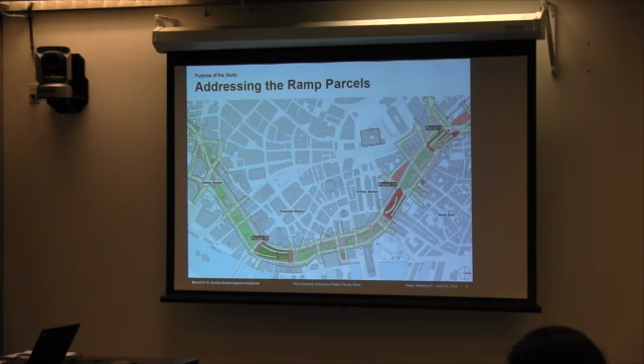There's a different view of it. Go to the next one. And again, a little better view. I think most of us know these parcels, they're very near and dear to us. They are pretty much three major unfinished parcels as part of the project. Parcel 18 being the southernmost by Rowes Wharf, parcel 12 over by Commercial Street and Faneuil Hall area, and parcel 6 over by Cross Street, Endicott Street, and the Haymarket Government Center, Haymarket Train and Bus Station.

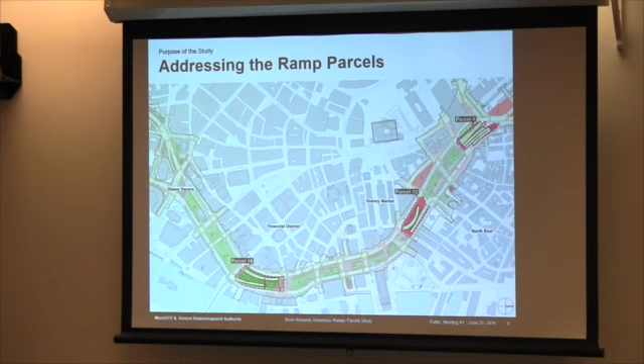We're going to have the team go through a pretty intensive slide presentation here, take you way back to the beginning and bring you up to the present. The purpose at the end of the day is for us to come up with a good plan of what we're going to determine to be the cover, whichever that may be, whether it be a literal cover, a building, landscaping, or screening of some sort for all three of the parcels. Tonight is the very first meeting. We're planning on probably a 6 to 9 month, maybe a little bit longer, planning process to go along with this. Towards the end, we'll go over the schedule.

I kind of say, buckle your seatbelt, stay with us. This is going to be a fun ride, and I think at the end of the day we're going to come up with something good for all three of these parcels individually and then collectively to fit in with the entire corridor. So with that, I'm going to turn it over to my colleague, Bill Tuttle.

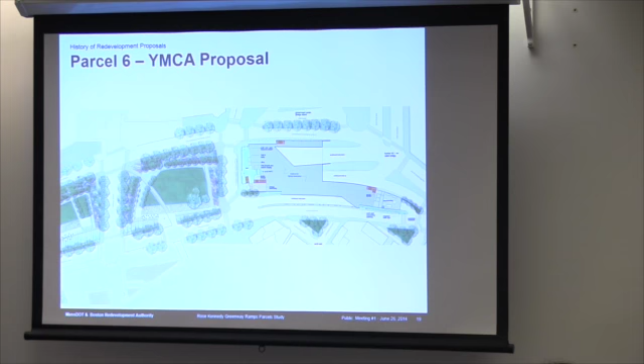To give you an idea of what they were talking about, here's a site plan showing how the building would grade. The large block at the top would have been, I think, a swimming pool and a gym. Here's what it would have looked like at the lower levels in conjunction with the parks next door on parcel 8. Here's parcel 6.

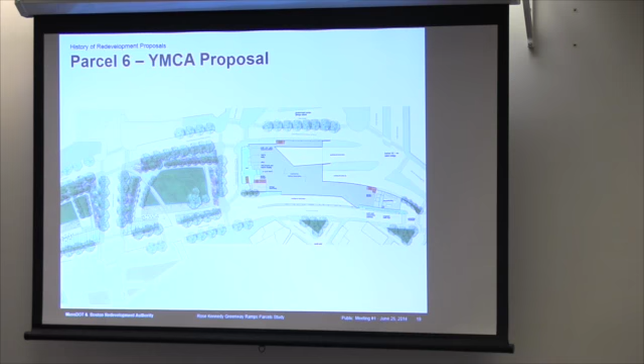This is what it would have looked like on the very first level. This is parcel 8 and 10, the North End parks. This is what it would have looked like looking from parcel 8, looking north.

And these are views from the sides, the long ones are from the sides. The lower one here would be the view from the north end. And this would be the view looking from the government center garage, except you'd have been a lot closer to it, so you never would have been able to get that long a view.

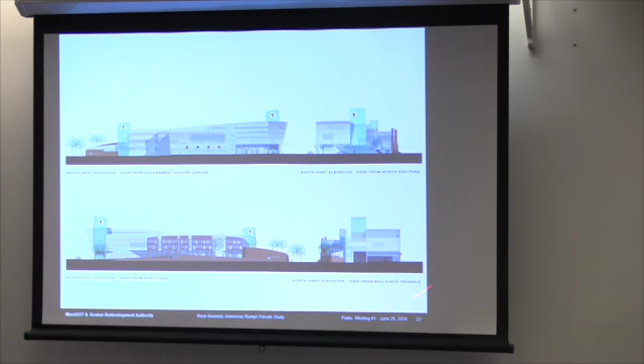This is a view again from the north end parks, and this is what you'd see as you drove into the ramps. An angled view, north end is on your right, the YMCA there.

So we did enter into an agreement. We had a fair amount of discussions, almost 5 years, with the YMCA, and we got very close, but in the end they couldn't get there. Even with the subsidy from the state legislature, they couldn't get there.

Because of that interest, we put out another RFP. The Boston Museum project again submitted on this parcel, as they had on parcel 6. The new Center for Arts and Culture submitted, and a third proposal was also submitted. In the end, we selected the new Center for Arts and Culture.

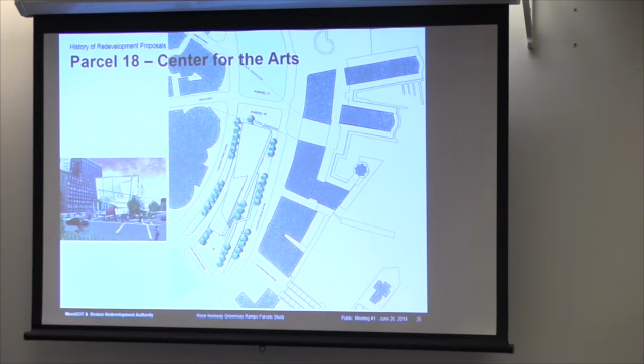We again went through a process with them of entering into and negotiating a development agreement. We started work on it, and when the recession hit, they pulled back, said they couldn't do it, and withdrew their proposal. So, a quick walkthrough of what they'd been talking about on parcel 18.

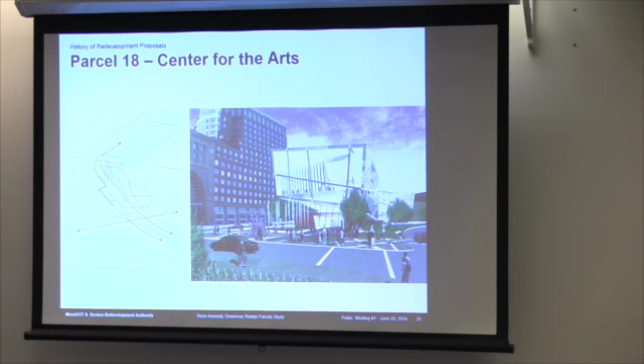This is looking south with Rowes Wharf on your left. It's a very prismatic, crystal-like building by Daniel Libeskind. And this is their view at night.

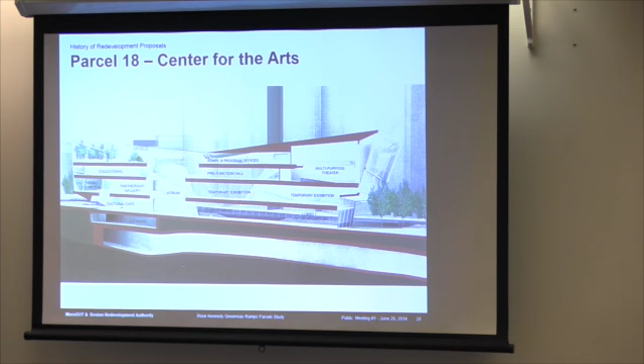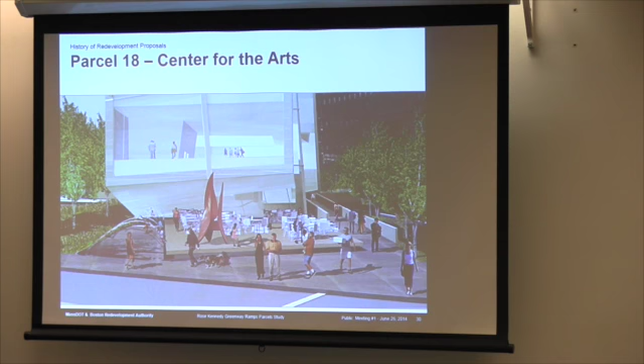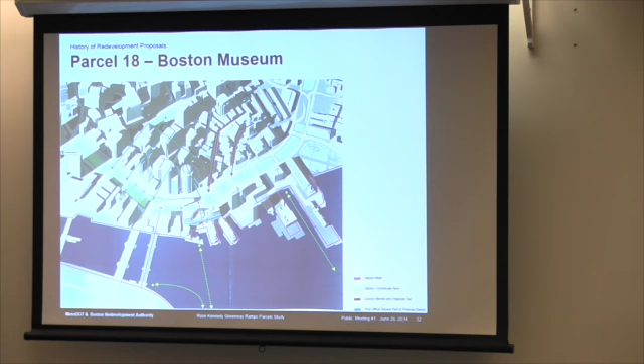The Boston Museum also proposed on parcel 18. They got a great deal of support for what their use was, but the general feeling from the neighborhood group gathered to comment, from the BRA and from Mass Pike at the time, was that it was a good proposal but the wrong parcel. The new Center for Arts and Culture was a better proposal for that parcel.

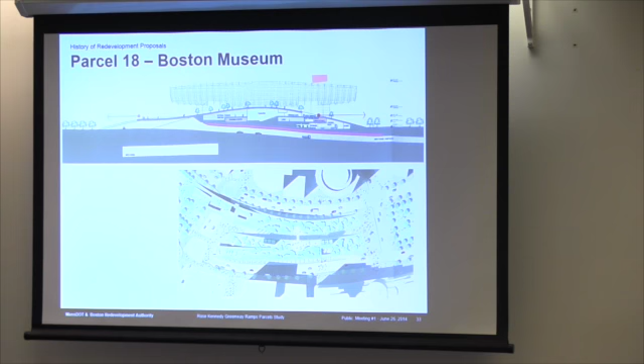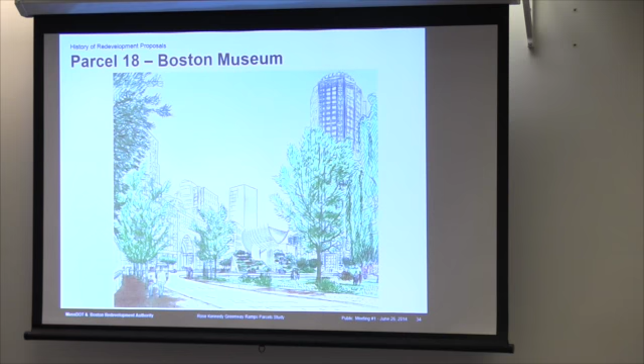Coming out of that, this is the proposal the museum put in on parcel 18, by Moshe Safdie - a curving semi-cylinder, glass semi-cylinder, sitting on top of a bump that went up over the ramps.

Coming out of that process, they had garnered enough goodwill and respect for their proposal that a decision was taken not to do an RFP for parcel 12, but to simply designate them for parcel 12, the Boston Museum project, based on their parcel 18 submission, which we did. We again started work with them, and this was how Moshe Safdie adapted that same design, that same notion, onto parcel 12.

North end on the right, Clinton - you're looking down Clinton Street on the left there. The curving form is part of the museum, and the swooping grass actually has a museum program under it as well.

They proposed, but same problem - when push came to shove in the recession, they did not have the money to finance this. That's a particularly hard parcel to cover, as we found out when they started to dig into it. So they withdrew, and then they proposed on parcel 9 where they were not selected, because again we didn't think it was the best proposal. So that's the history.

Let me check my notes to make sure I didn't miss anything. I should say on parcel 12, there had been an interim planning process between the RFI we did and when we named the museum project. Both a community group, with funding from Mass Pike I would gather, hired a consultant to do planning on what an open space there might look like, or a building project, and CA/T project staff had also looked at possible building and park alignments. Suffice it to say we never quite got to agreement on that, and in the interim the museum project came along and they were named for that parcel.

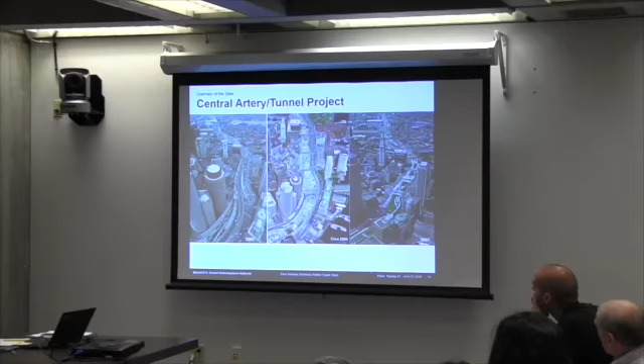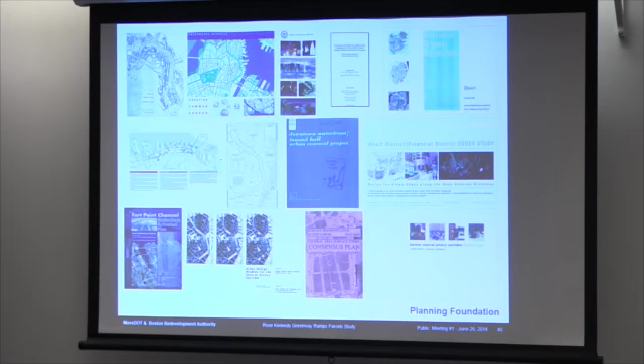There's been a lot of planning done over the last, I don't know, three, maybe four decades - some by the city, some by the state, some by other interested stakeholders. But the most important, as it relates to the actual park parcels, was the Boston 2000 plan. The Boston 2000 plan included plans for the parks themselves, but also a boulevard plan, a housing plan, a district by district plan, and also established parcel by parcel uses.

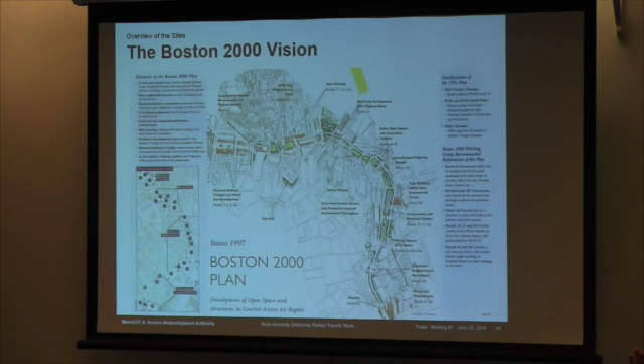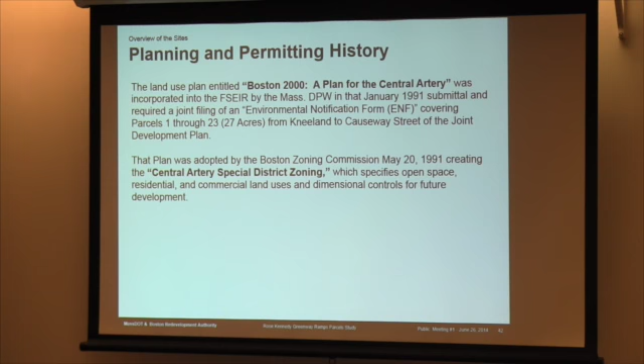It eventually led, quite quickly thereafter, to Article 49 in the Boston Zoning Code, which was approved by the Zoning Commission in 1991 and provides the dimensional regulations, but also urban design guidelines for each of the parcels. Here we've got a chart showing the general uses, height, lot coverage, FAR. I'll just talk about the uses.

Parcel 6: recreation, open space, and community uses are permitted, with height up to 55 feet. Parcel 12: residential uses, community uses, cultural uses, and local retail and service uses, also capped at 55 feet.

Then parcel 18, which is divided into a northern and southern portion, but with very similar uses on each - urban plaza, open space, seasonal and festival uses, cultural uses and restaurant uses on the north side, and open space, arboretum, community uses, and restaurant uses on the south side. Both portions of parcel 18 are capped at 35 feet. The reason is that originally the parcel was an open space parcel - the only buildings envisioned were small kiosks that wouldn't extend beyond 35 feet.

Most recently, we looked at the edges of the parks in the Greenway District Planning Study, looking at all the parcels adjacent to the Greenway and how we, as a city, should guide future planning for those parcels that once looked at the elevated highway and now look into a future park system.

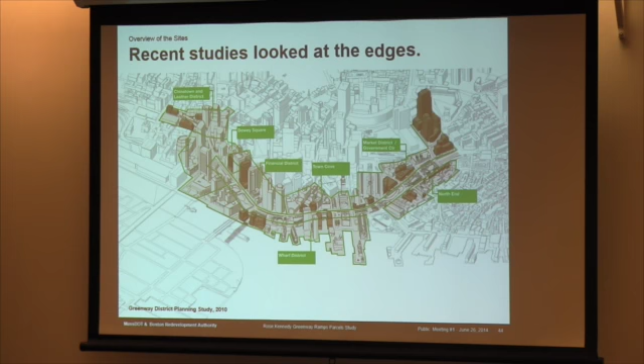Now it's time to reconsider the ramp parcels. In a sense, this study will be the culmination of the planning for the Greenway corridor.

This is our opportunity to change and complete the way the parks work and are linked together. With several years of successful growth along the Greenway, we now really have a chance to look at these with fresh eyes, and I think the time is really good for that. I'm glad in a way that we waited a little while on this.

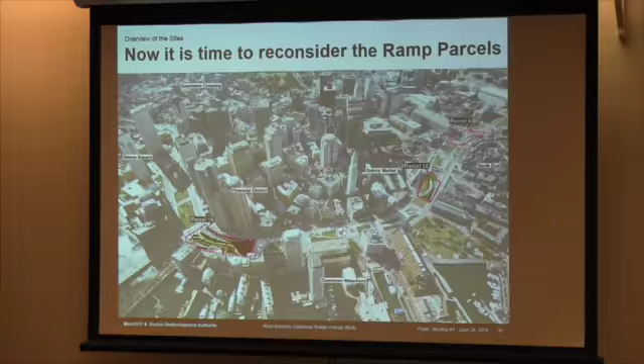Determining the future condition of the ramp parcels is really going to give us a chance to sew everything together. We don't have any set conclusions about what the ultimate configuration of the ramp parcels is going to be, but we do want to find a creative and sustainable solution for the city, for the Greenway Conservancy, for everybody involved. So I'm going to turn it over to Brock, who's going to go into far more detail on the conditions of each of the parcels.

Not that much detail. Try not to bore you all.

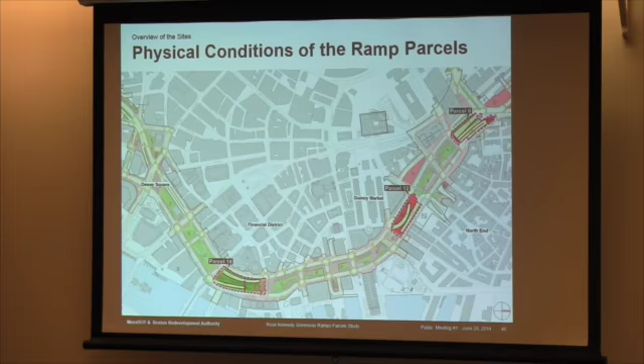You've heard the planning aspects from Lauren, you've heard the history from Bill, and that's a great starting point. All I'm going to get into with you tonight is a little bit of detail on each of these parcels, so you can have a better understanding, for those of you who don't already know, about some of the physical constraints that the design team is ultimately going to have to deal with, and what may be able to be done on these parcels. So starting with parcel 18, going from south to north.

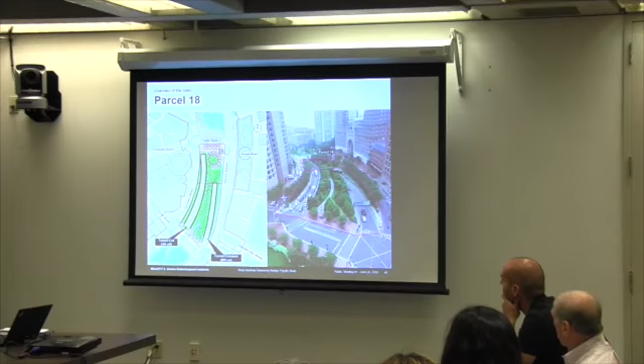This is a view of one of the original maps, the one you see on the back of the wall. This defines what Lauren was referring to as a split between the southern portion of parcel 18 and the northern portion of parcel 18 - basically split where the ramp diverts here.

For the area, this is the financial district here, right across from Rowe's Wharf. Hopefully what you see with the picture is a real-time view of what that looks like today with the park in place, and how plush and wonderful it is to actually walk through that area on the ramps.

It's interesting, because as we've been walking through that park in that area, it's very difficult to actually feel that you have ramps on either side of you. So the landscape that's there has done a really nice job at masking a lot of that.

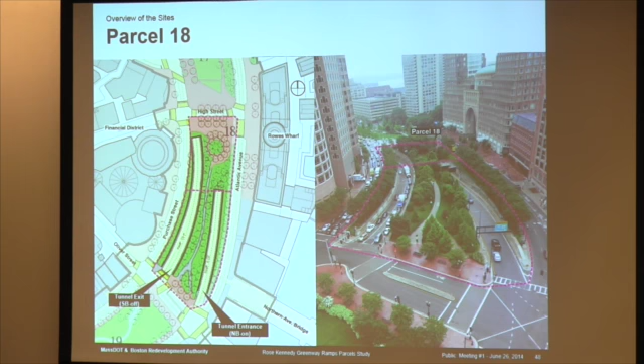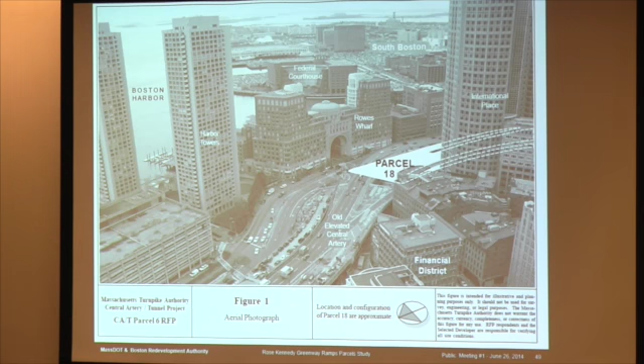Some of the specifics - there's going to be some overlap with what Lauren talked about regarding the zoning requirements established under Article 49, but I wanted to hit on it a little more to help people understand the limitations and the plan for these parcels moving forward. The total parcel area is about 85,000 square feet, or about 1.9 acres.

Under Article 49 zoning, which is what Lauren was talking about, it's zoned for urban plaza open space. That was the original intent - the desired use is open park area.

Key considerations that the design team is ultimately going to have to consider are the vertical clearances, and you're going to see this is a constant theme as we go through these parcels, since we're looking at how to develop over the ramps. Major considerations are vertical clearance requirements for trucks and vehicles coming out of the tunnels, along with air quality, lighting, ventilation, and sight distance.

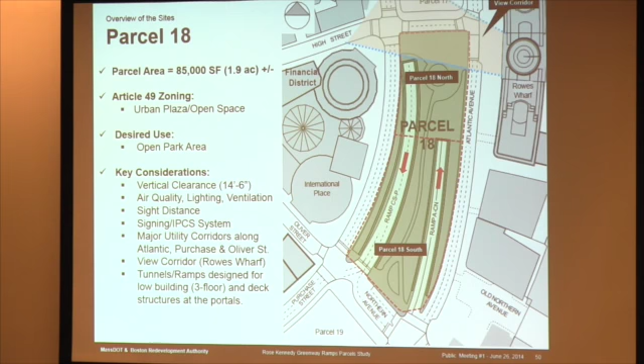Now the 14.5 feet is critical because that's not just to the top of the vehicle - it has to include all clearances once you come down from the ceiling, including ventilation, lighting, and any signage. That 14.5 feet has to include all of that, clear distance from the bottom of the surface to the bottom of the sign, so that vehicles can get through without hitting anything.

Signing systems, the control systems, the electronic control systems. There's also major utility corridors that cross along Atlantic Purchase and Oliver Street, basically bounding this parcel, that lead to some pretty significant constraints as far as when you're opening up the street in that area.

A view corridor has been established out to Rowes Wharf, as you all know. It's this area here that's defined. So that's a limiting factor of what can be developed in this area.

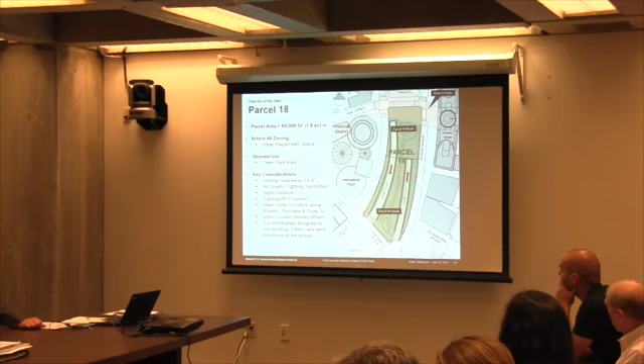And then the tunnels and the ramps are designed for low building, 3-floor, and deck structures at the portals. So when the original designs were being put together, the designs for the tunnels and the boat sections were put together assuming that there was going to be something built on top of that, so it's ready to handle that load.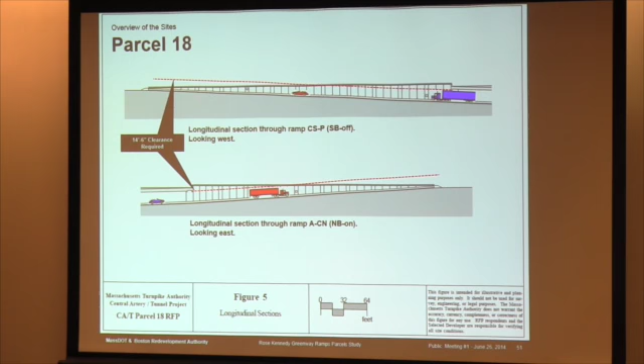And the whole intent of what this slide is trying to show you is this red line that comes up here. That establishes what that 14.5 foot clearance is intended to be, that's that envelope that nothing can go on top of. Nothing can encroach in that area to allow vehicles to get out of the tunnels. The significance of that, as you look at photos, is that any development that's considered has to be well above this line, so that traffic flow is not impeded.

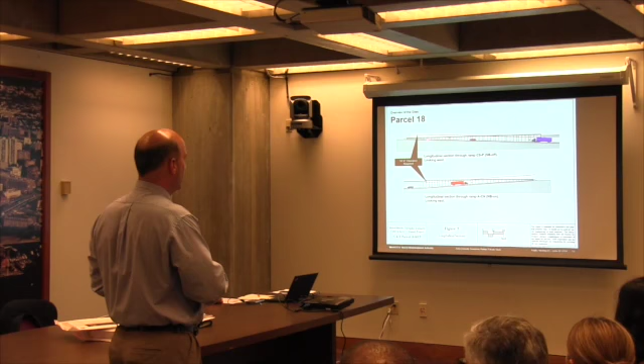And that was a big thing that has been considered by a lot of the building development alternatives that have been considered. Everything has to go higher, and that's the reason why. You can't have something down here so that as a truck or a vehicle is coming out of the tunnel, they're scraping the roof, scraping the roof, scraping the roof, and then the roof is gone off the truck. So the whole point is that all of those developments have to go up high enough so that vehicles can continue to get through there unobstructed, including any of the signage that goes with the highway and the lighting that goes with the highway.

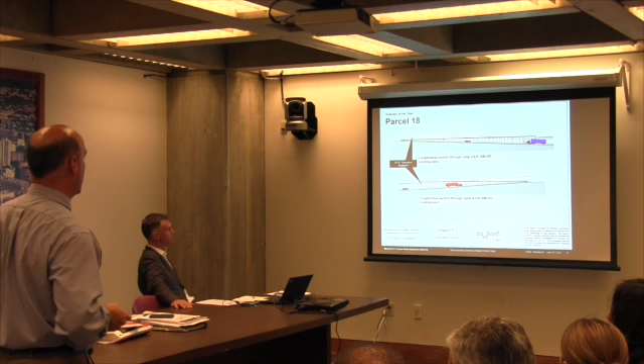Now, if you were to slice through that parcel from south to north, if you're standing on that parcel wondering what's underneath your feet, this is it. So these are section views walking south to north through parcel 18 that would show you where the tunnels sit underground and where the ramps are above ground.

And as you go south to north along that parcel, the ramps drop down. Ramps drop down from what we call a boat section here. These boat sections here go deeper and deeper underground.

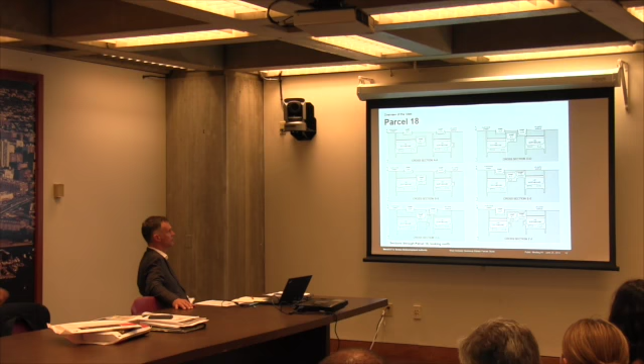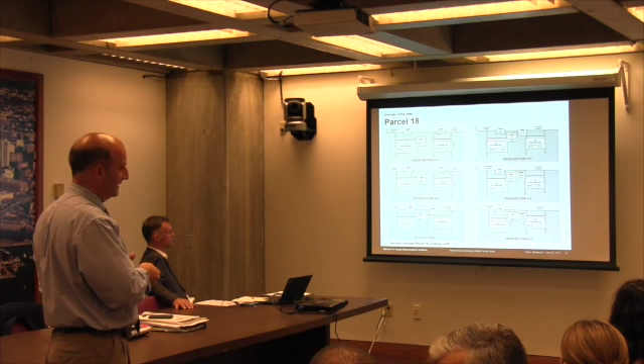So the challenge in trying to develop a parcel like this is you have to maintain that 14.5 feet over this, and what you can see from that is that any building development has to be done up here to maintain that clearance over the ramps.

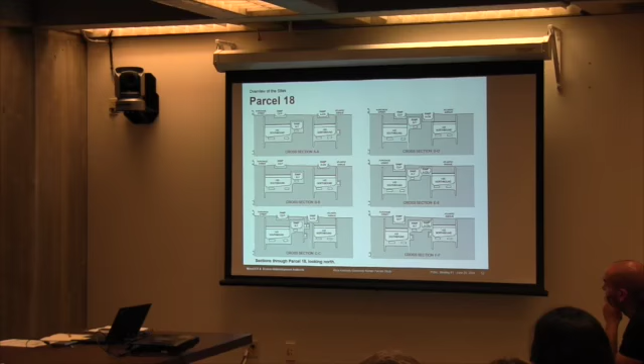So these section views just walk through the parcel from south to north. As you can see, as you progress from A to B to C to D, E, and F, that just walks you through the parcel and shows you how the ramps dive down into the ground here, here, and ultimately here. These are just views of parcel 18 on Seaport Boulevard, looking towards Rowes Wharf.

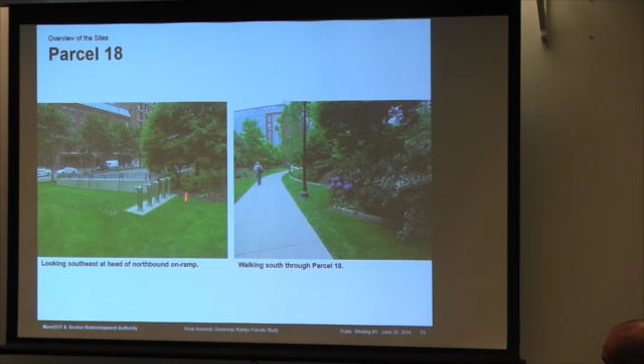This is walking through the park from south. Nice vegetation, very well masked. You really don't get any idea that there are ramps on either side of you. The only place where you really get an indication of a ramp coming out of the ground is here, where this area had to remain open for the hydrant stand.

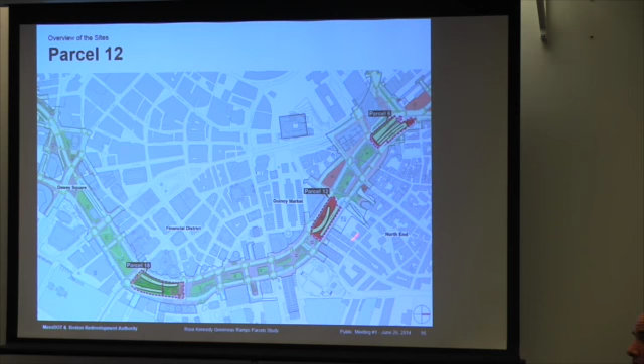Now we're going to talk a little bit about parcel 12, and there's going to be a lot of similar themes here as we walk through this. Everything that I really just talked about in parcel 18 is going to be very similar here. So as you know, parcel 12 is here. It sits right alongside Quincy Market, right alongside the north end.

You can see the outline here, this red line. That defines what the parcel is, and also pictured over here. So the tunnel exit, northbound off-ramp here, and the southbound off-ramp here. What's interesting about this parcel is how close the ramps are. And if you look at how close they are, very unlike parcel 18, where there's actually room between the ramps, where that walkway was constructed and there was nice landscaping that was built between the ramps.

Here you don't have that opportunity because it's very confined, it's very constricted. You really can't do anything between the parcels. And that's posed some problems for pedestrian access back and forth, north and south.

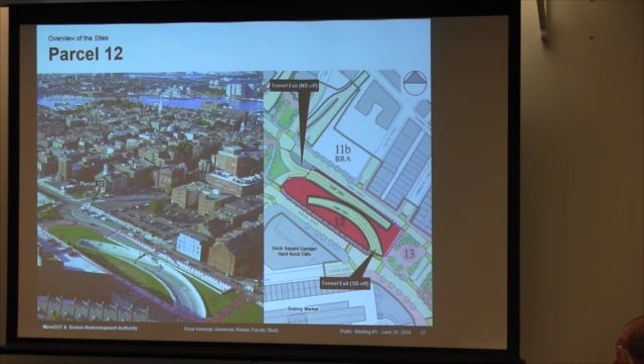Some of the criteria: total parcel area, 51,000 square feet, or about 1.2 acres. The Article 49 zoning calls for recreation, open space, and the zoning allows for a building. Allowable uses include residential, community facility, commercial, and business.

Hopefully this coincides with the table you put up. Key considerations - let me go back and identify this. Here, this is parcel 12. This is the parking garage where the Hard Rock Cafe is, and the cross street sits here.

So vertical clearances, just like we talked about on the previous parcel, 14.5 feet, all of that still applies. Air quality, lighting, ventilation, sight distance, the signing systems - all of that still applies.

Similar to parcel 18, there's a major utility crossing that goes east-west across the corridor like this. It's fairly wide, I think 50 or 60 feet, and it has basically everything underground needed there for major utilities in a city like Boston.

Similar to parcel 18, there's a view corridor established along the southern portion of the corridor that looks towards Commercial Street. So there's a restriction on what can be built on that parcel.

Similarly here, the tunnel ramps were designed for future loading, a 5-story building. However, we understand that the southbound off-ramp was not designed to withstand that loading. So that's one of the restrictions that will have to be considered as the parcel is developed, whether it's a building or a park or whatever.

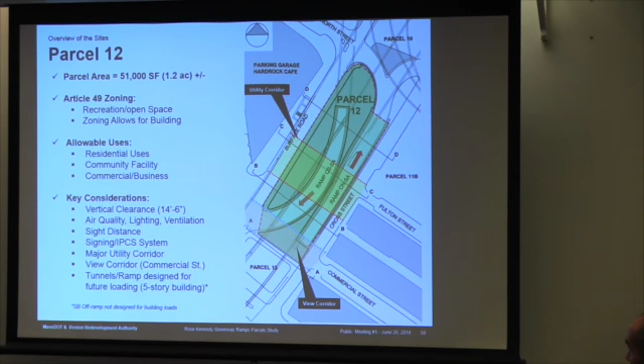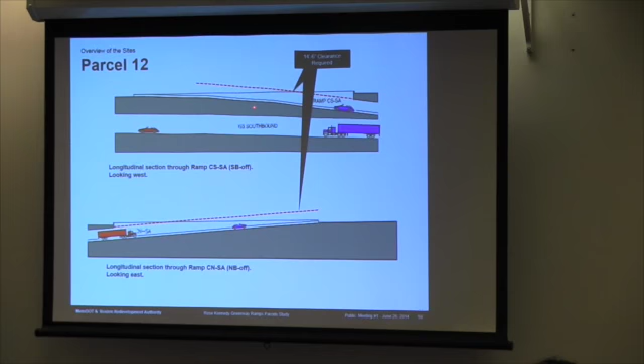So again, you get the section view looking through the ramps and the tunnels as you're driving through. And same thing here, you have that 14.5-foot clearance envelope that everything would have to be built above if it was to be developed as a building parcel. It gives you an idea that everything would have to be above this, which puts it considerably higher than the grade that's out there.

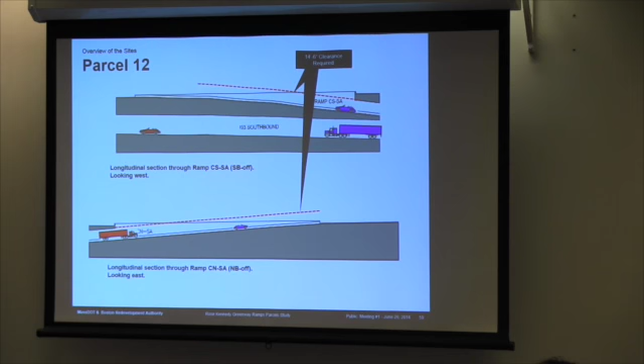Similar to the last ones I showed you for parcel 18, here's the tunnels underground. So as you're standing up on the surface here, all the tunnels are underground. This shows you the configuration of the ramps.

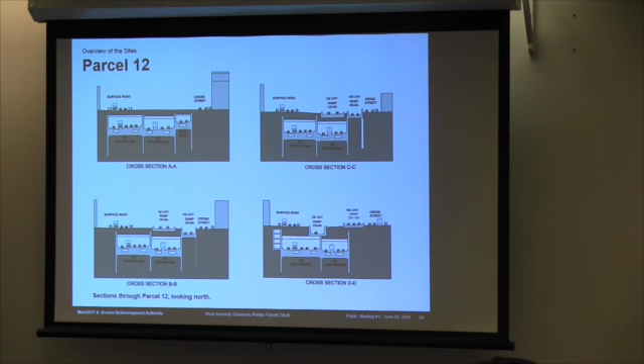The only thing I would add is when you say building over, it's anything built over it. So if there's an open space deck, it has to comply with the same clearance requirements, not just a building with people occupying it - any structure. Anything that would cover the ramps has to be up at that elevation.

No problem. So again, slicing through the site, through the parcel from south to north, this shows you the configuration at various stages through the parcel of where the ramps, surface roads, and tunnels would be. As we look to develop these parcels, these are all things that have to be considered. It's not just what you're looking at on the surface, but the engineers and designers have to consider everything underground as well, from utilities to tunnels, soils.

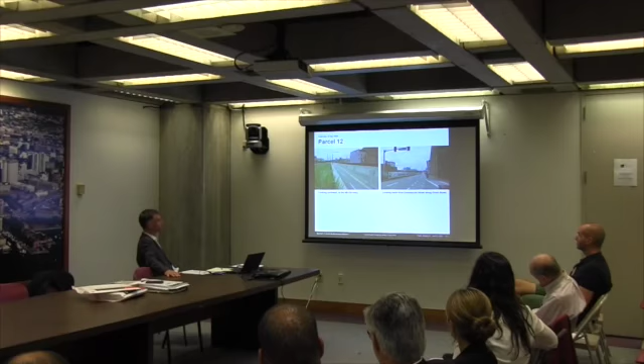Just some photos as we go along. This is the southern end of the parcel. Greenway folks working, making it all pretty. View along the ramps - this is northeast at the northbound off-ramp. And this is looking north from Commercial Street along Cross. That's the fence line with the artwork hanging off of it.

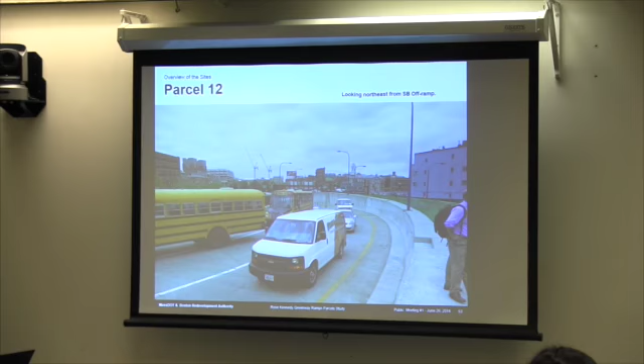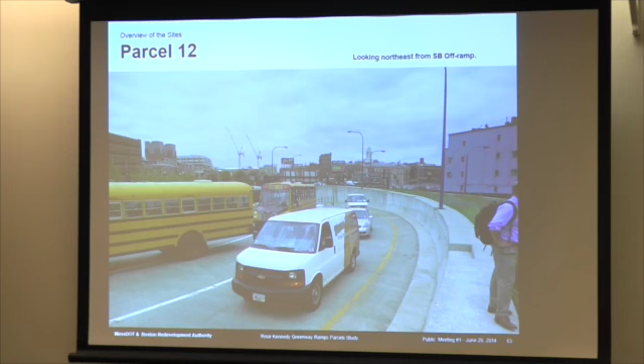Just another view looking northeast from the southbound off-ramp. Yeah, that's me - and one should not stand on the ramp like that. I was told I shouldn't be up there. That's true, I didn't take that picture, Matt took that picture. That's not me jogging - that's just a nice view looking southeast.

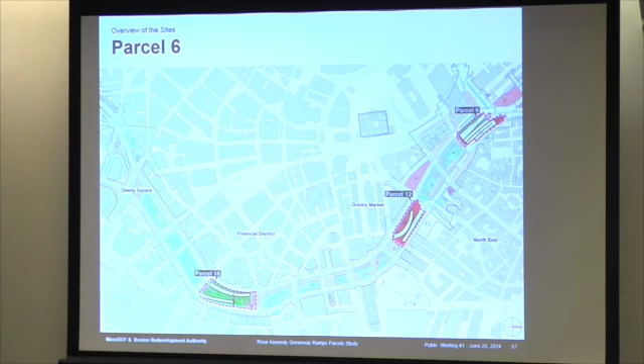Now the last one, parcel 6, is up at the northern end. It's a very different parcel, with very different constraints - that's this area outlined here. As you all know, there's very, very little land to be developed there. Basically the entire parcel is encompassed by ramps that would have to be covered, and again, covered at a higher elevation.

So here's the outline in plan view, and you can see all of these yellow areas - all the southbound and northbound ramps. So there's really very little land available to do anything with. Basically, the entire parcel would have to be covered to do anything with that lot.

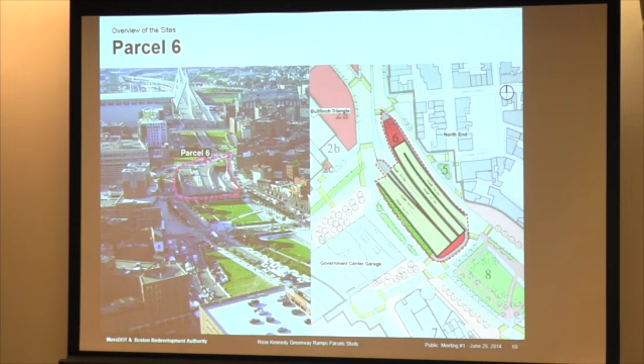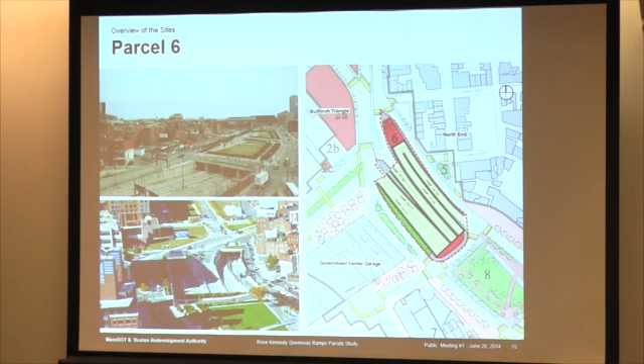Just other views looking into the ramp portals here and here from different directions. And again, this is Government Center Garage here, Bulfinch Triangle.

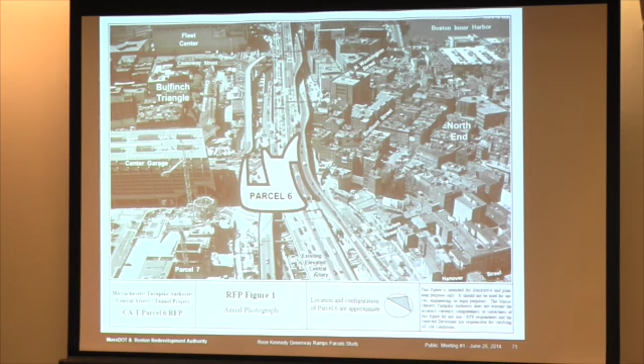This is another one of the historical views that we got out of the RFPs, and Bill tells me he's the one that sketched in this nice little blob that defines the parcel definition, but that's plotted on top of the old elevated artery, which gives some nice perspective when you look at what's there today versus what used to be. So again, some interesting information.

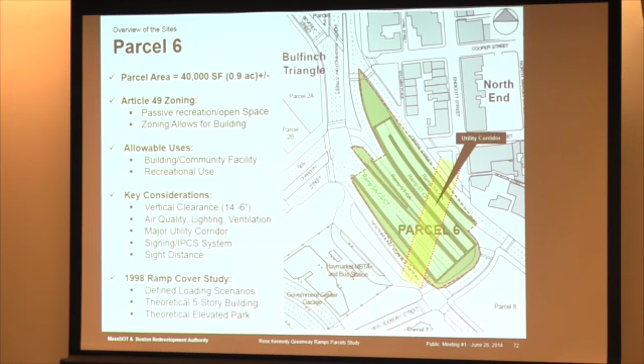The parcel area is 40,000 square feet, the smallest of them, 0.9 acres plus or minus. It was zoned for passive recreation and open space. The zoning does allow for a building, community facility, or recreational use. All the clearances we talked about still apply: vertical clearance, air quality, lighting, ventilation.

Major utility corridor here, going basically from east to west across the parcel. Goes above the tunnel, underneath the ramps.

Sight distance is a concern as you come out of the tunnels looking at the signage. Now in 1998, there was a ramp cover study done to help define what could be designed on that parcel. Out of that came some defined loading scenarios, and there were a couple of theoretical designs done: one was a park deck, and the other was a 5-story building.

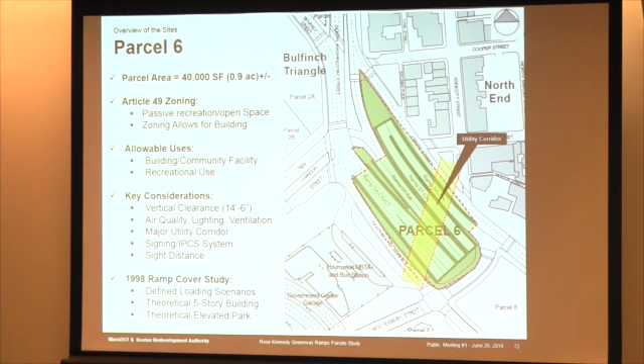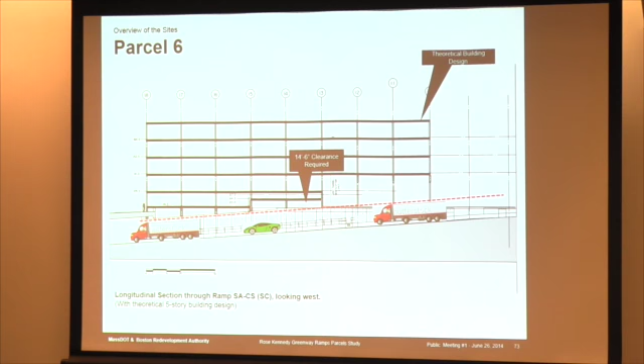So when you look at that in section, this is what the building looked like, a 5-story building. Now what's interesting is when you consider the 14.5-foot clearance that has to be designed into that clearance for the vehicles coming out.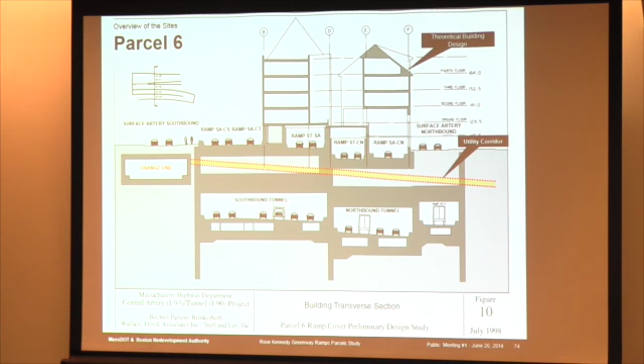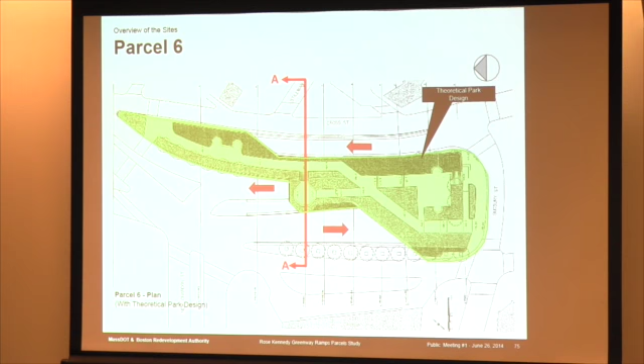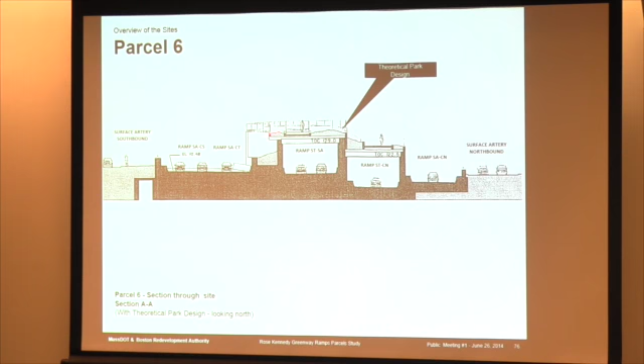Similar to the other things we've talked about, there's the elevation issue you have to consider, the clearance envelope to get vehicles out of the ramps. And that's what that looked like - here's the concept that was designed. Again, you have the 14.5-foot clear coming out of the ramps, plus whatever clearance would be required for signage, ventilation, and lighting. That basically dictates that the deck would have to be elevated like so, 15 to 20 feet above those ramps.

Here's just some pictures of the entrance portal. So we'd be talking about elevating some 14.5 feet up here and basically elevating as you go through that, as the ramp comes up - actually, I thought I had a different picture of that.

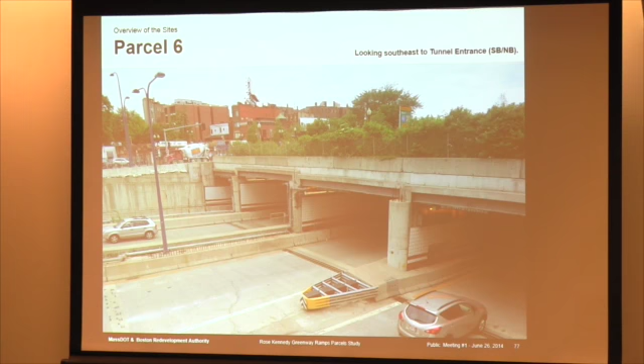All right, I won't bore you with that. So you get a sense for as the ramps converge with the ground on the outside, that deck is going to have to come up.

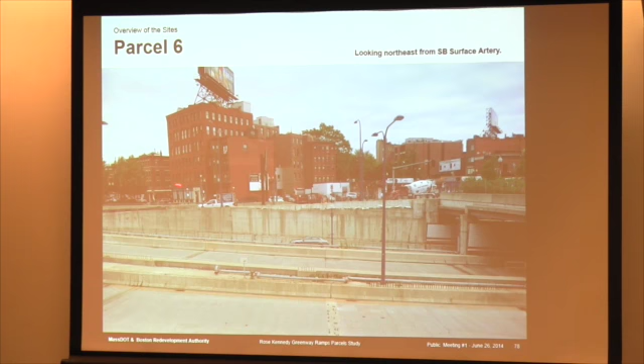There's some more pictures going down the other side. Here you can see it a little bit better as the ramp comes up out of the ground, converging with the ground out here. So you can see that as a result, any deck that is put up is going to have to be up in this area to keep that clearance envelope free.

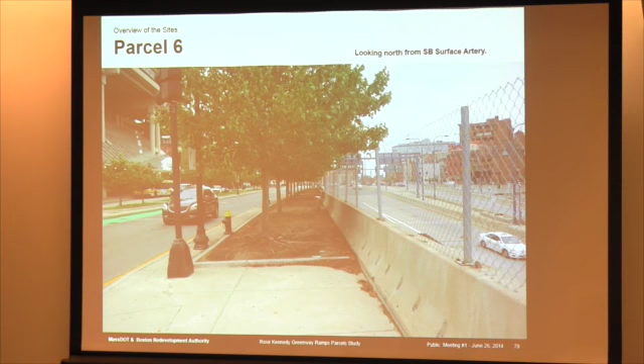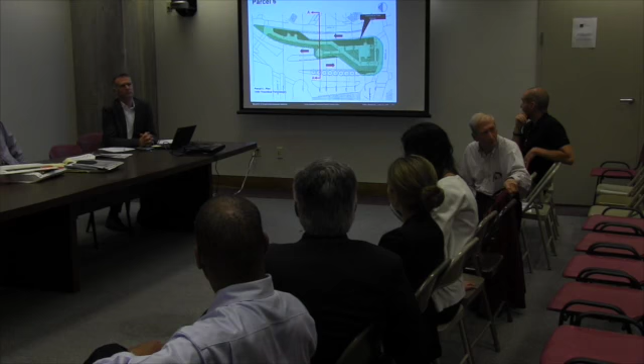You showed what? We showed the deck, yes. But what I also remember is that, granted, there's a whole new community in the North End now - this is a whole new process - but at the time, seeing that and comparing it to what they hoped for, which was something like the YMCA, they didn't like the decking. I was just going to suggest you could still find some of your old materials - it was a little more developed than that. We have that study - thankfully, sometime in the past, I scanned it, so we have it.

It was Bill Lindemold who did a full study about the deck and the building. He looked at both a building and an open space, but the one I have is only for parcel 6. Since we had interest in the building, that's what we went forward with - it turned out it didn't work out. But I remember you didn't like the look of the decking. So obviously, as you get into this, people feel that way. The YMCA was very enticing - it was a very nice amenity that would have been good for the neighborhood.